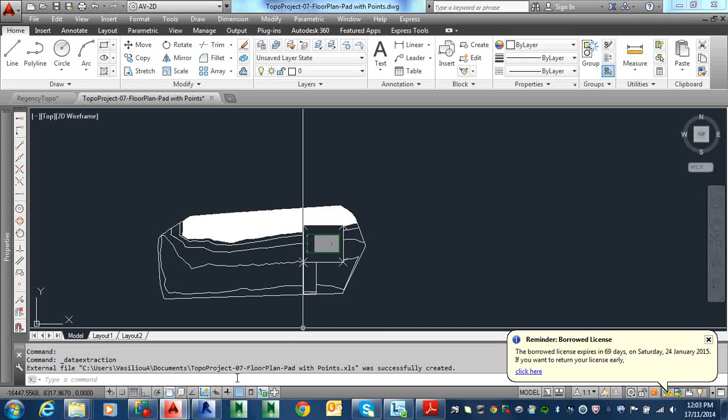Okay, what I'm going to do is export this out to AutoCAD, and we're going to put some points in AutoCAD, and then we're going to show you how to export it out. All right, so let's go with that.

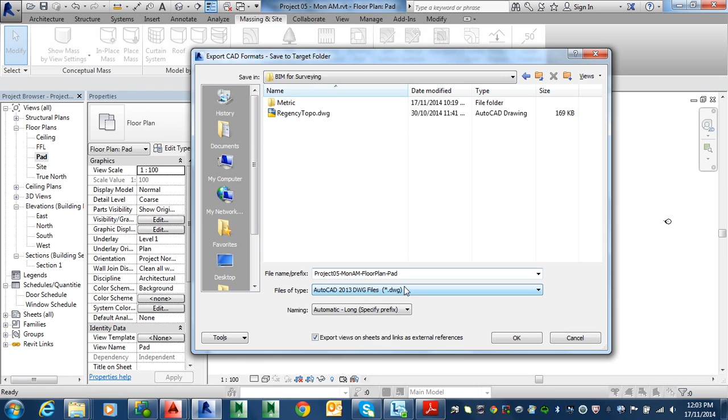Go to export, CAD format, drawing. Just make sure you know where you're putting it. Go next, nothing changed there. I'm going to put it in my documents here, and this is where I'm going to keep this stuff. So I'm going to put it in here. There it is, save that.

Okay, so I'm going to head over to AutoCAD now, and I'm going to open this file, which is meant to be sitting in my documents under there, and that's the one I just did. Open that up. Alright, so this is what I get.

So what I'm going to do is put in a point. If you put in lots of points, I'll teach you this - there's a command called multiple in AutoCAD, and I'm pretty sure it might be in BricsCAD as well. Multiple, alright, so it should come up. I'm going to, because with the point you can only put one at a time if you just type in the command. There is an option actually which you can put more. I just got to find it.

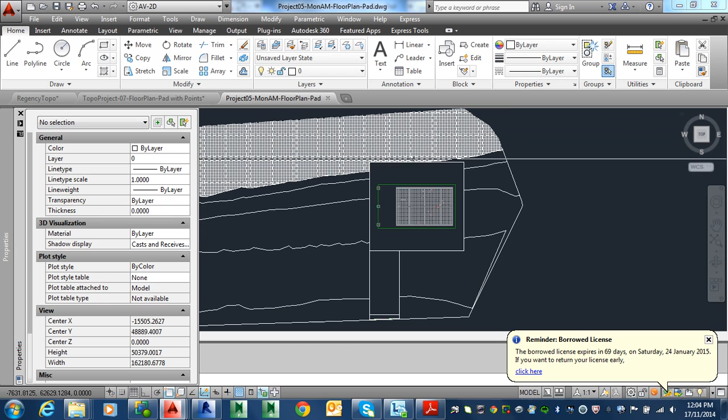Sorry, this is hiding something here, so I just got to close this. Hang on, just lost my draw tools. If I go point here, sometimes that repeats. If I put that point there, yeah, it does allow me to repeat if I get it from here, but if I type it in, it doesn't. So if you type multiple and then the command point, it will repeat, or any command, move, copy.

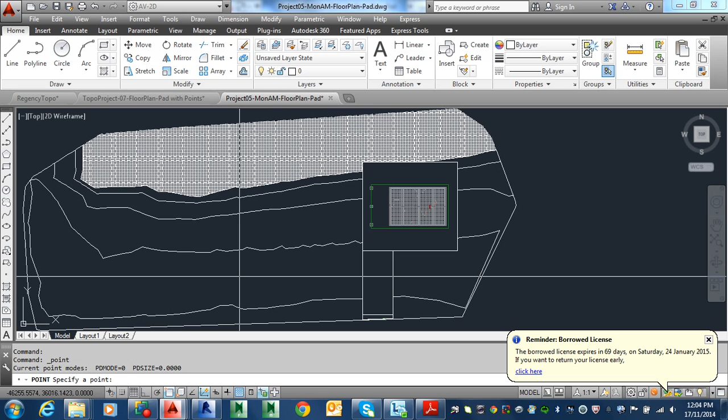Anyhow, I've just put a point there, but you can't see it. But anyway, just continue putting the points in. Of course, you've got to put them in the right layer and all that sort of stuff. But I put them in each corner, all right, for now, and I'll show you how to make them active as well, so you can see them. All right, so they're the points there.

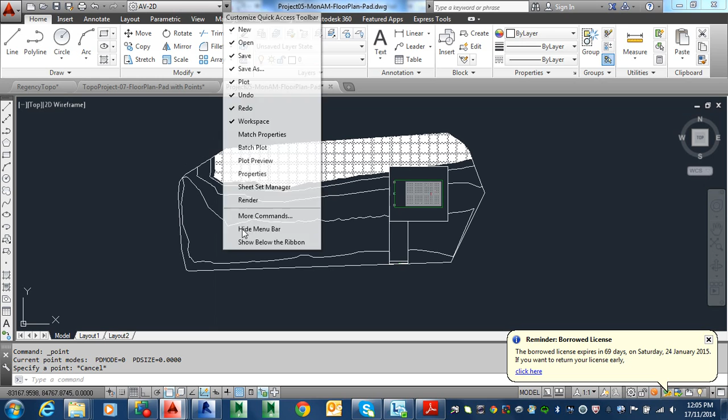I did turn on my menu in AutoCAD. You can go down here, and usually it's like this, no menu, but you can go here and go to show menu, and from there I go to format. First of all, I'm going to make the points so that I can see them, big crosses.

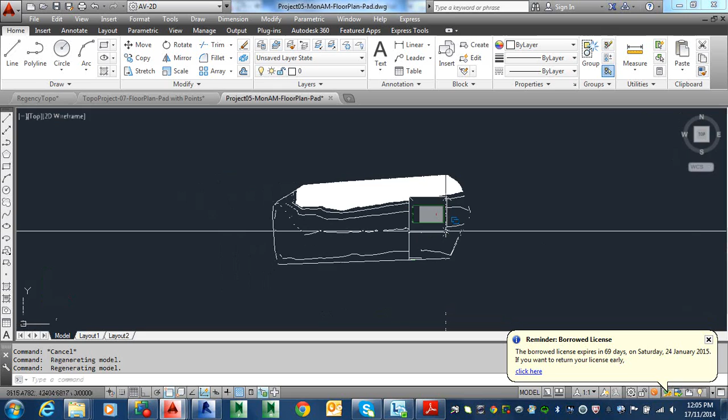Okay, there they are. Now I'm going to put them at the right level, because this is only 2D. All right, it's flat, doesn't know what level they should be. All right, so let's just - in fact I'll work in 3D so you can see better. I'll zoom in. I'm going to highlight these. Well, I can use a filter or something, but just get all these.

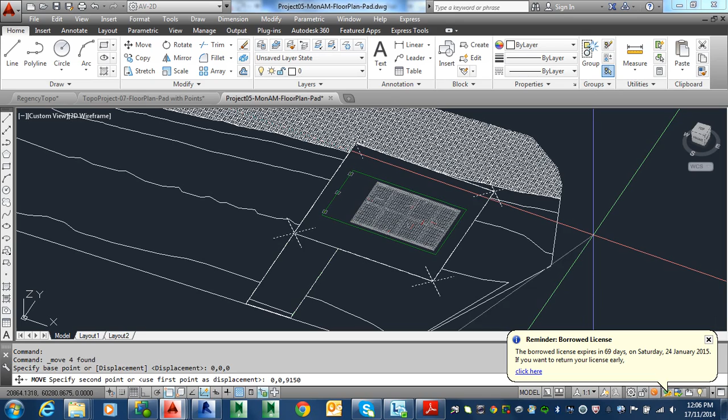It's only 4 of them, and I'm going to move them to a new level. So I'm going to go from 0, 0, 0, which is where they are, to 0, 0, 9150. That's the level they should be at. All right, so it throws them up in 3D, but they're directly above where they're supposed to be.

All right, so now what I'm going to do with this here, under Tools, next to the format, here we go - Tools, there's a command called Data Extraction. You click that, and then you go creating new, yes, go next. Well, I'll just put it into here. I'll call it whatever, I'll call it points, doesn't matter. And you can save this, and you can reuse it next time.

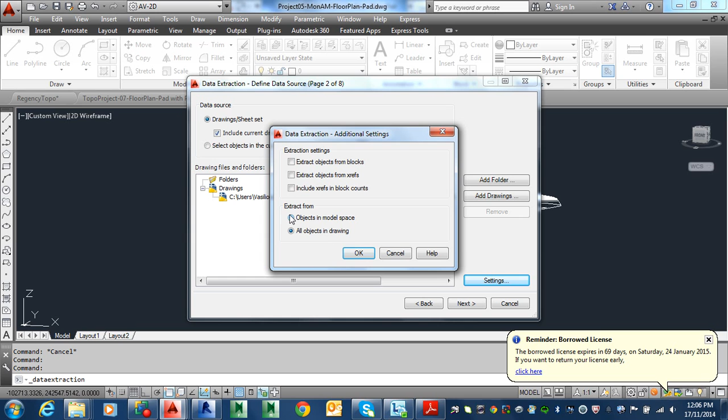Settings, I don't want any extras, there's no extras anyway, but all the objects in this drawing, I can select from objects in model space, but just go all of them. Go next. It comes up with this. What do I want? I don't want the polylines, I don't want the lines, I just want the points.

Whereas I think BricsCAD only works with blocks, this one will work with geometry, so you don't have to put in a block. So go next.

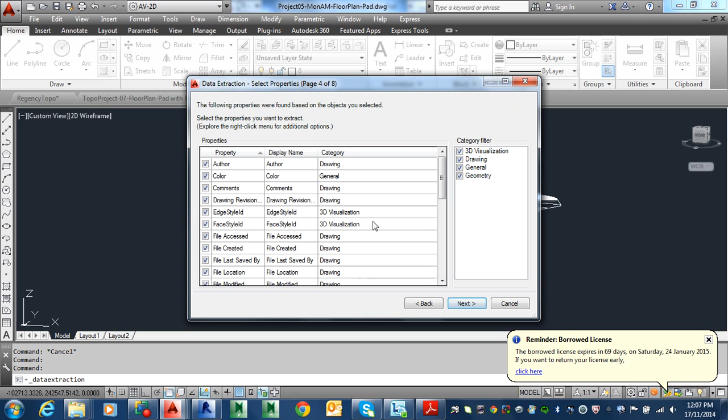Here I want to tick off everything relating to general drawing, 3D visualization. I just want to work with geometry, and all it's finding for points is that the X, Y and Z value is what it's going to give me, which is exactly what I want.

Go next, and it says they're the columns, so you have options to move around the columns, or you can probably even, no, it says it's a point name. Anyway, we can't change it here by the look of it. I was going to give it some point name, rename. You can only rename the column, you can't change the individual thing. That's what it is. They're the coordinates, which seem correct. If I go next,

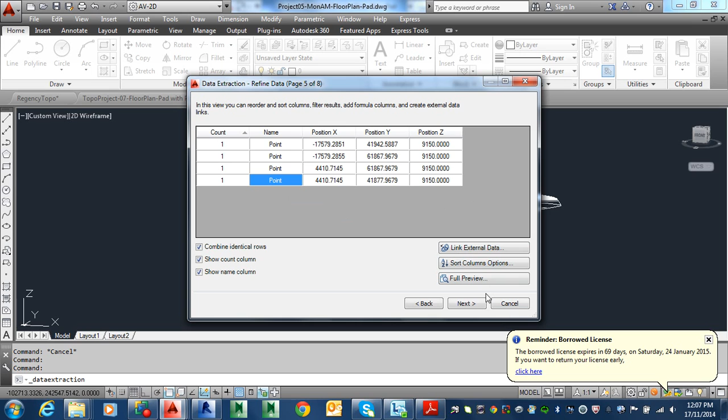output data to CSV or whatever you want. At the moment it's outputting to XLS, but I can change it to CSV if that's what your machine reads, and go save. Let's put it in the right folder again and save that, and go next and finish.

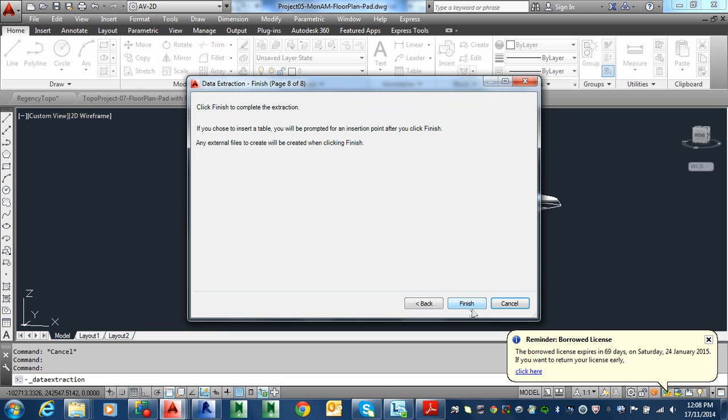So basically I'll go back to my folder, which I think is here, and I'll modify that. Should be a CSV file in here. I don't know where. It should be in here. In this mess. What was it?

It's on here before. Is this where I put it? The H drive? Oh no, on the wrong spot. Sorry. Should be in here. Let's see. Here you go. That's the one, CSV file.

Open it up in Excel so you can have a quick look. You can open it in anything. So here you can change these points to whatever you want to call them. If you want to rename them, A1, A2, or whatever. Alright, so that's basically it.

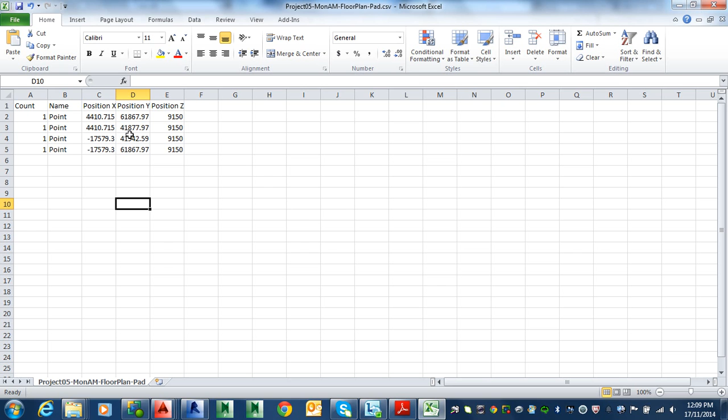The coordinates seem to be okay. They came through in 3 decimal points, whereas they weren't like that in Revit actually, because it was rounding them up.

It does give us that, I'll just show you. I'll quit that. I'll show you how to get better rounding out of this as well with this command here. So if I go here and I click on that, it gives me to 1 decimal point.

If you want more rounding, what you need to do is go to manage, fine where we are, but go to project units and go to length, for example, and change that to have, say, 2 or 3 decimal points, whatever you want. Go OK.

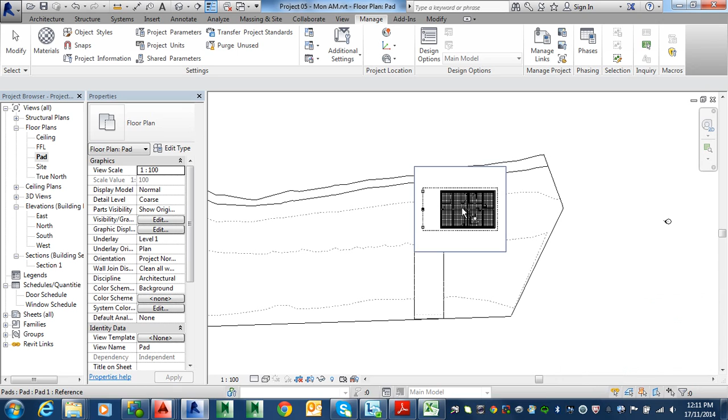Alright, so okay now. So now if I go to this command now, I can go here and I get 2 decimal points as a result. You can play with that, but if you export it out into AutoCAD, it will come out exact anyway. Alright, that's it.

Basically we've seen a couple of ways of getting the points out. One is the manual way through Revit. The other one is to export into AutoCAD and then export out again to CSV file from AutoCAD using its very unique command it's got there.

As well as if you're using BricsCAD, you can put a block there with some attributes which you can also extract through BricsCAD. This is the program I think that will improve Revit in the future, and I expect that to be here in a couple of years. I'll put that on and we can watch that for a little bit as well.